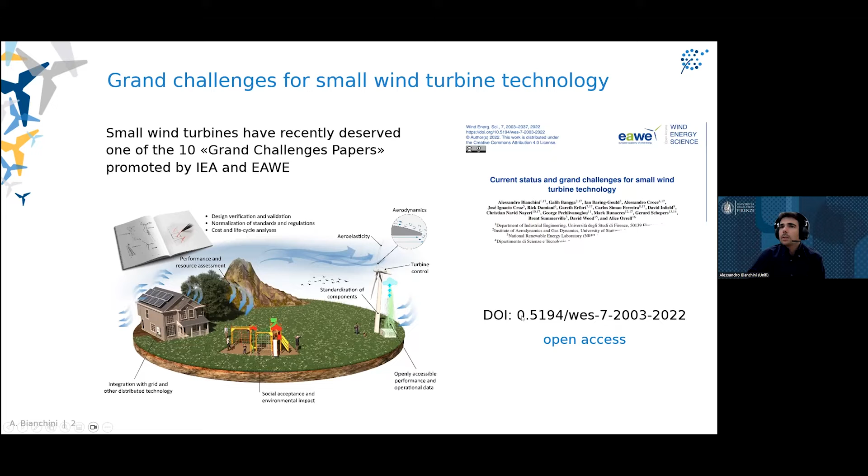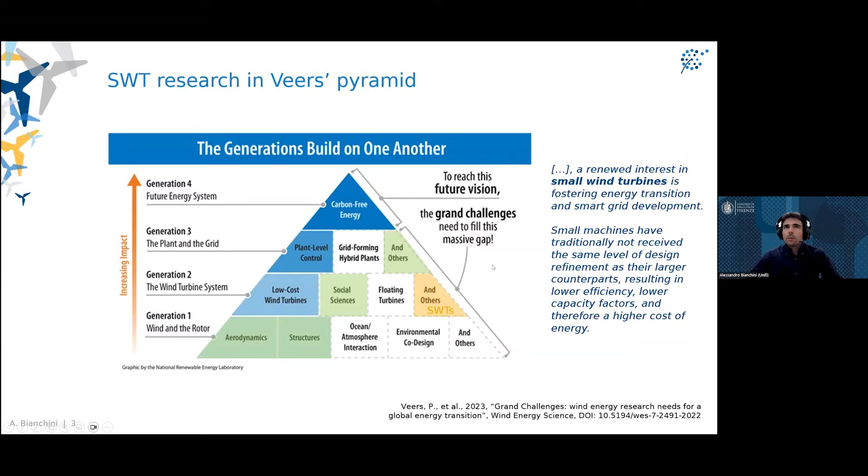A short, non-linear story of the paper: as you may know, the European Academy of Wind Energy created a few years ago some technical committees as collaborative groups to foster research on different topics. I had the pleasure to lead the small wind turbine committee for the first two years since its foundation.

One of the very first scopes of the small wind turbine committee was to deliver a white paper on, as you can imagine, small wind turbines. But what became apparent very soon is that the original plan was to have it focused on Europe, but that was a little bit reductive. The topic needed a more comprehensive approach, and also we needed to gather competencies and experiences worldwide, because Europe is not the only, and probably not the biggest, market for small wind turbines.

So the group became much bigger. We had contributions from other colleagues in Europe as well as all over the world, and also coming from different backgrounds, which is also very important.

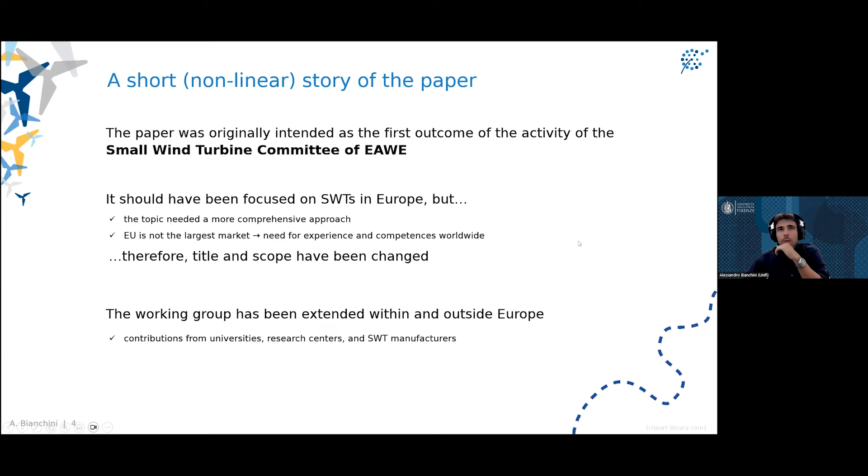The paper had two main scopes. The first was providing an overview on the status of small wind turbine technology. If you take a look at the paper, sections 2 and 3 provide an overview about market diffusion, some updated economic data, and a description of the main technical features of small wind turbines in comparison to utility scale ones. Due to time, I won't present this today, but you can find it in the paper.

The second part was defining, from our perspective, 5 grand challenges that we suggest as key to foster the development of small wind turbines in the near future. Let me repeat: we are not saying this is the only solution. Many of you have experience in this field and may have different visions. The scope of the paper was to restart and stimulate discussion on the topic, and to try to be as systematic as possible.

What we tried to do was first define a series of unknowns and gaps for small wind turbines, and then rationalize all the inputs and experience of the authors into defining improvement areas and prospects to address these existing gaps.

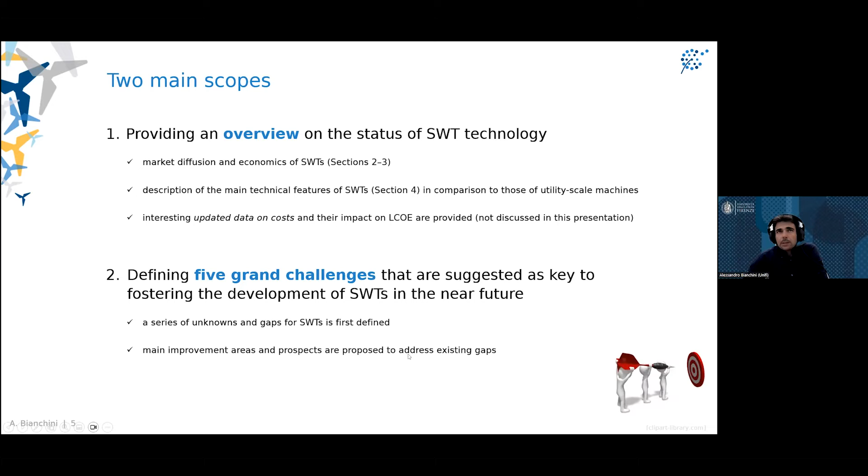As said, we first tried to highlight some of the unknowns and knowledge gaps for small wind turbines, and turned it into 6 main categories. The first is that small wind turbines are entitled to having higher levelized cost of electricity with respect to utility scale wind, mainly due to the lack of economy of scales and higher balance of station costs.

The second drawback is an uncertainty in the actual power curves. Not too many turbines have certified power curves. I was happy to see earlier that some good producers are now providing very high quality products, but on a worldwide average, this is not always the case. We also have uncertainty in the local wind conditions, and this in turn leads to a poor estimation of the annual energy production.

Another drawback is that over the last decades we saw intermittent incentives, regulations, and feed-in tariffs that were not only different from country to country, but also intermittent in time, which makes it very difficult for producers to stay in the market.

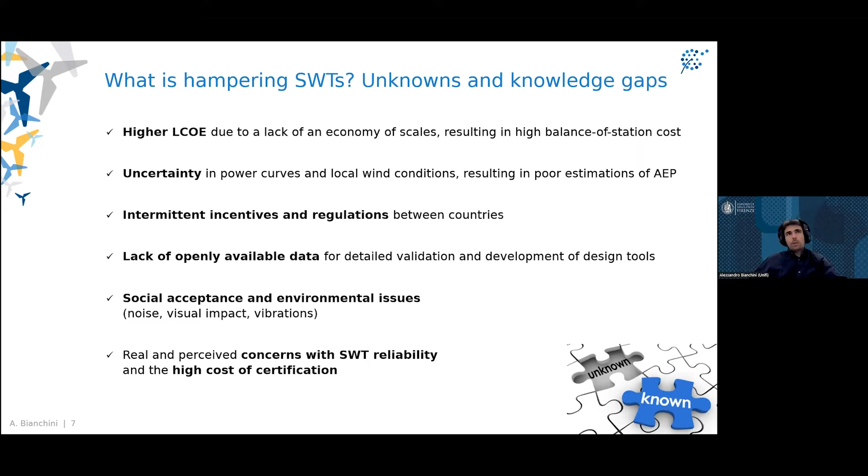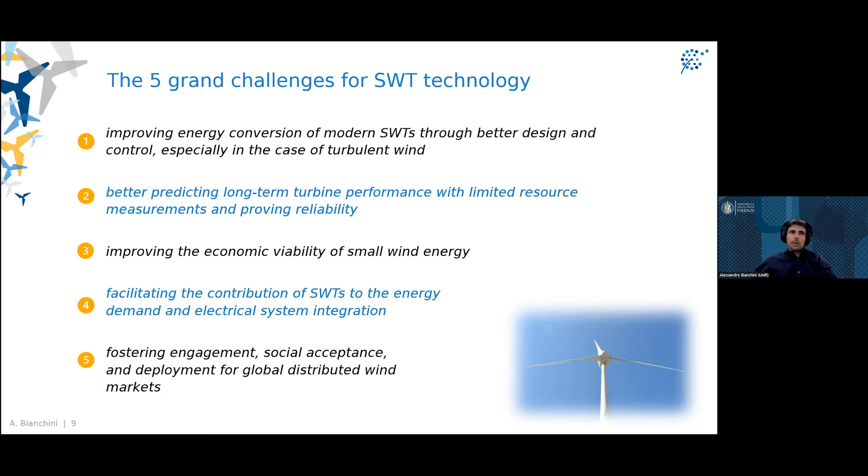Moving from this background, the paper suggests 5 grand challenges that you see listed here, but I won't read them all, and we will try to analyze them a little bit more in detail.

Grand challenge number 1 is to improve the energy conversion of modern small wind turbines through better design and control, especially in the case of turbulent wind. I came from the aerodynamic design field and I'm an expert in airfoil aerodynamics in turbulent cases, so this is probably my number 1 grand challenge.

The background is that small wind turbines traditionally did not receive the same level of design refinement, often to keep costs low. They are typically installed in areas with lower winds and more turbulent, gusty oncoming wind, so maximizing energy harvesting is not easy. That's why many wind turbines have been shown to underperform compared to expectations.

So what can we do to tackle this grand challenge? We need better insight into the impact of turbulence and gustiness on turbine performance, and better design and analysis tools able to account for this complex blade-flow interaction. We need solutions to exploit these winds better, such as taller towers or different rotor designs, like low specific power rotors to harvest energy at lower wind speeds, and multi-objective design to make efficient turbines while keeping costs low.

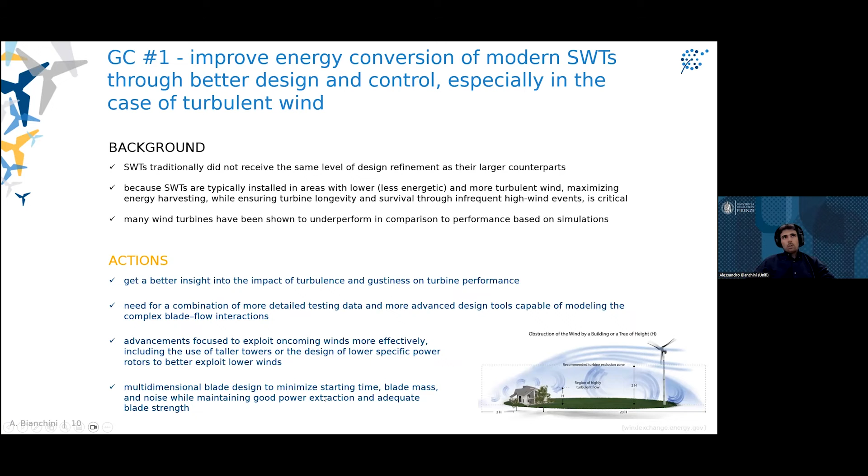Moving to grand challenge number 2: improve the prediction and reliability of long-term turbine performance despite limited resource measurements. Defining the long-term performance of a turbine is mainly made by combining two elements: first, having a good estimation of the actual power curves, and second, correctly estimating the resource. Doing this is not always easy because we often lack reliable measured data.

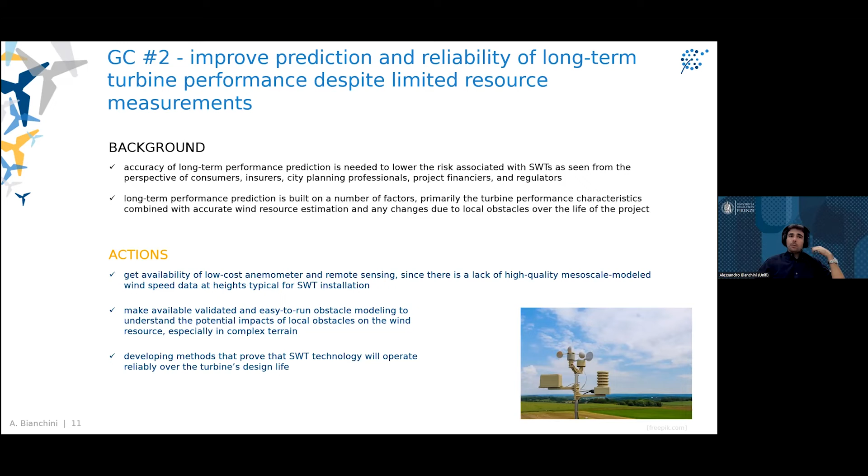So what we can do to tackle this grand challenge: having data, possibly open access, is very important, especially because we miss mesoscale modeled data for these low heights where the effect of obstacles is very relevant. That's why we would also need methods that can better model the impact of obstacles on real installations, and finally develop methods that prove small wind turbine technology can really operate reliably over its design life.

Grand challenge number 3 is probably the most difficult and most relevant: improve the economic viability of small wind energy. We need competitive LCOE. This is particularly tricky because of the cost of materials, installation costs, and because small wind turbines have not coalesced into a single archetype, which makes creating standardized solutions and economies of scale not always easy.

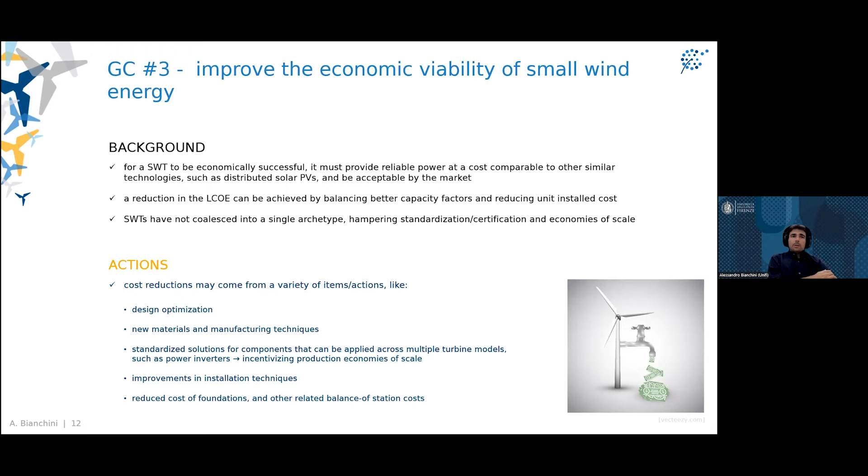So the suggested actions: we need to reduce costs through multiple actions. We can optimize the design, explore new materials and manufacturing techniques. Very important is to access standardized solutions that can potentially be applied to multiple turbine models, such as power inverters, to incentivize economies of scale, and also reduce costs for items like foundations, towers, and other balance of station costs.

Grand challenge number 4: facilitate the contribution of small wind turbines to energy demand and electrical system integration. Currently we have around 1.8 gigawatts of small wind power worldwide, coming from 1 million turbines - a lot of very small insertions of power into the grids. The highly discontinuous power production from small wind turbines can be hampered in some grids which have restrictive limitations in terms of ramp rate.

If we want to convince people, communities, and politics that small wind turbines are really competitive with PV panels, we need not only to make them more efficient, but also to integrate them very well with the grid.

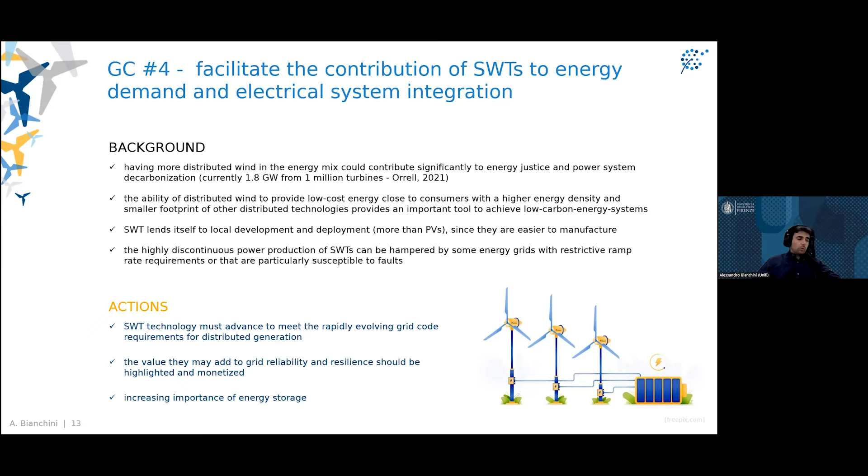So the action we need to put in place: small wind turbine technology must advance to meet evolving grid code requirements. If we invest money into that, we also need to ensure that the value small wind turbines may add to grid reliability and resilience is properly monetized and highlighted. Also, given the increasing importance of energy storage, we need effective coupling between turbines and storage for a variety of reasons - load shifting, but also power quality like power smoothing.

Moving to the fifth and last grand challenge, called foster engagement, social acceptance, and deployment for a global distributed wind market. NIMBY-ism is still hampering a lot of potential installations, so to overcome this issue, we need to enhance the social understanding of small wind turbines, provide real evidence that modern turbines, as in the example we've seen before, are really able to perform much better than their predecessors.

We need to put special attention on environmental impacts, to ensure communities that installation of small wind turbines nearby their houses, buildings, or facilities is not a risk. We also need to push and harmonize policy and regulatory aspects across countries, because this would really allow deployment of the technology in a more effective way.

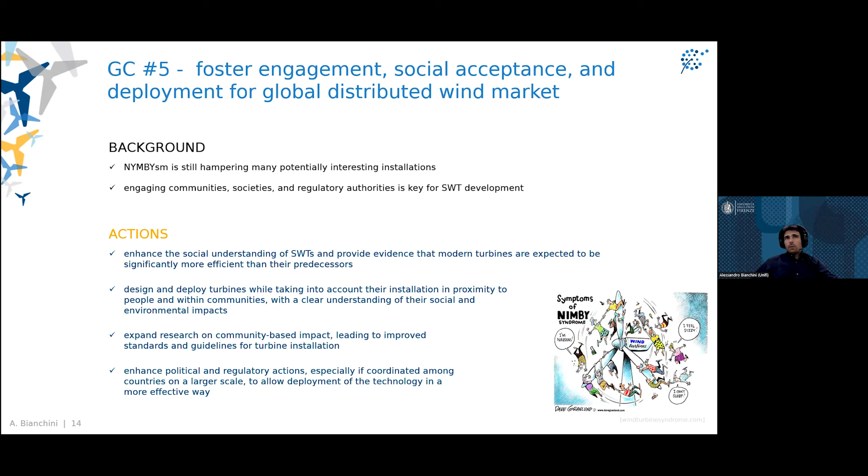To do that, the paper suggests 10 key enablers. I'm running out of time, so I'll go quickly through them, but if you're curious, you'll find many more details in the paper.

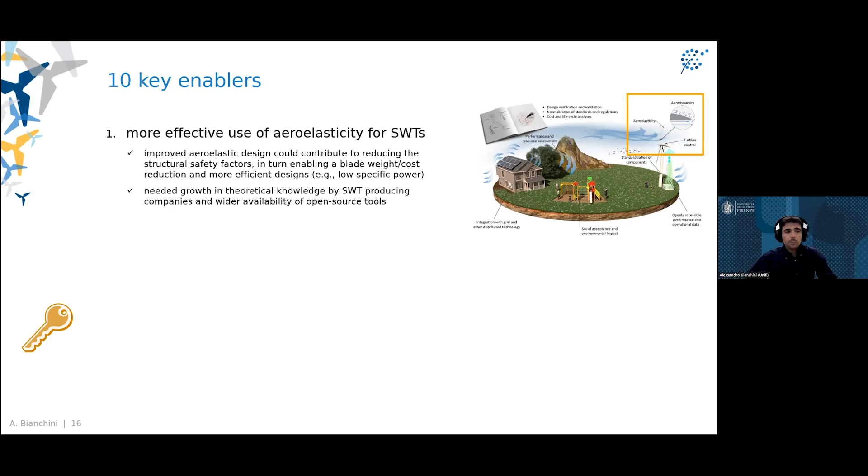The first key enabler is more effective use of aeroelasticity in small wind turbines. Aeroelasticity is the basis for the design of larger scale turbines. It hasn't been used that much in small wind, but if we want to improve the design of new machines - for example going towards lower specific power rotors or having lighter, more flexible blades - we need to introduce aeroelasticity. To do that, we also need to train the personnel of producers to use the codes and really understand elasticity.

We need to improve control strategies. We're seeing a fast transition away from furling towards more advanced active controlled-stall strategies.

There are also some examples showing that individual pitch control, even though it is difficult to include in small wind due to space constraints in the nacelle and cost, could provide real improvement in production and alleviation of loads, which could be useful to make blades lighter and cheaper.

We need to improve the aerodynamic design, especially with focus on low Reynolds airfoil aerodynamics in turbulent environments. This is relevant not only for performance, but also to ensure better control when designing stall control-based machines, and also to reduce noise and account for air density variation.

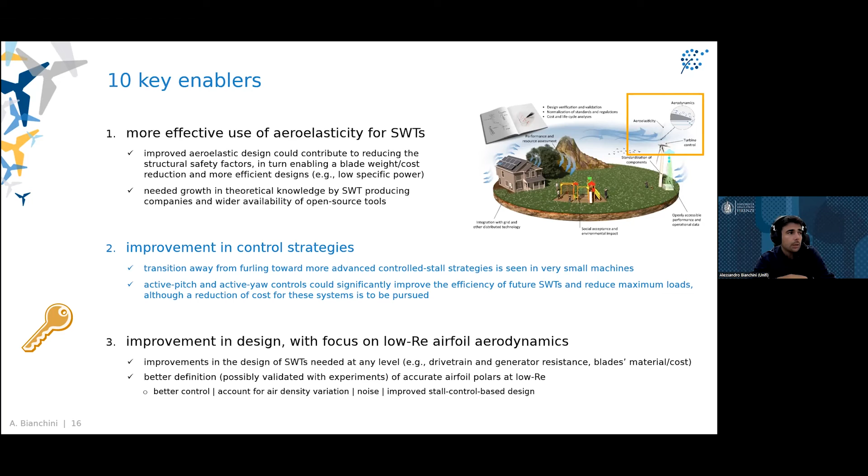The example we saw before of a small wind turbine installed in a mountain is very nice, but if you install a turbine at over 1,000 meters, the density changes quite a lot, so we need to be able to account for that properly.

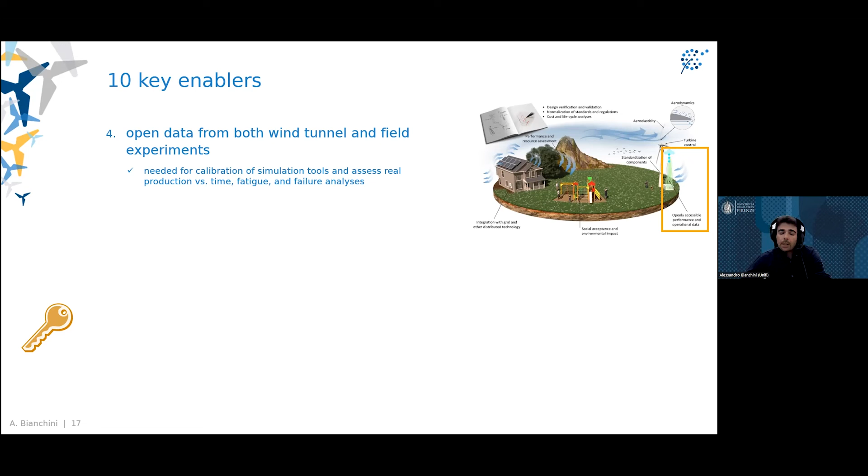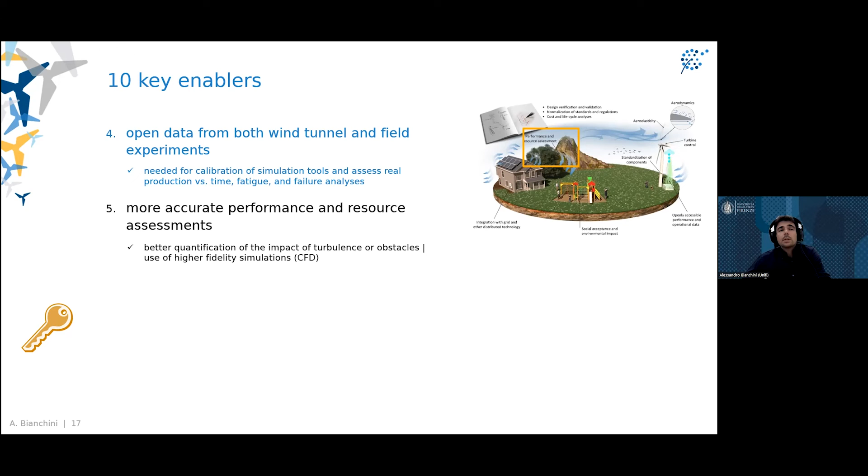Fourth enabler, we have discussed this already: open data, both from wind tunnel and field experiments, to calibrate and tune our models. Fifth, more accurate performance and resource assessment—again we have already discussed it. This can be done both with experimental measurements and with higher fidelity methods like CFD.

Sixth, better validation and verification. This is very important and discussed a lot in the paper, because what we could do in the future—and design is evolving in this direction—is allow smaller turbines and more established archetypes to benefit from less onerous requirements in terms of load assessments, validation, and certifications. This could speed up the process and also promote standardization.

Standardization is exactly what we probably need, because it's very important to promote economy of scale, which in turn reduces cost and makes LCOE more competitive. Standardization, as discussed in point 6, is also needed for regulations and standards.

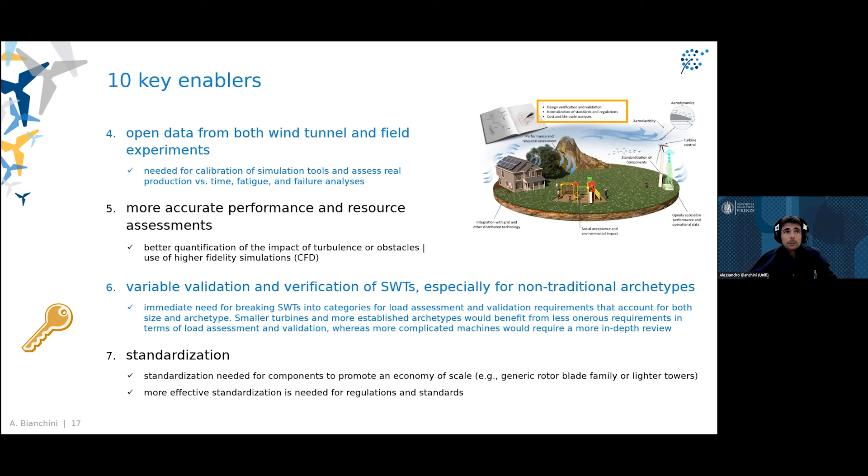Coming to an end, the eighth enabler: we need detailed studies on cost and life cycle analysis, because they are very useful to identify methods to reduce installation cost.

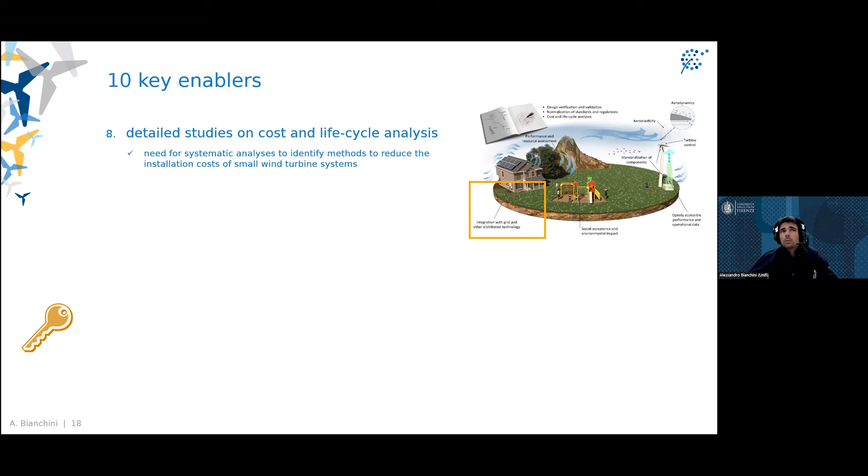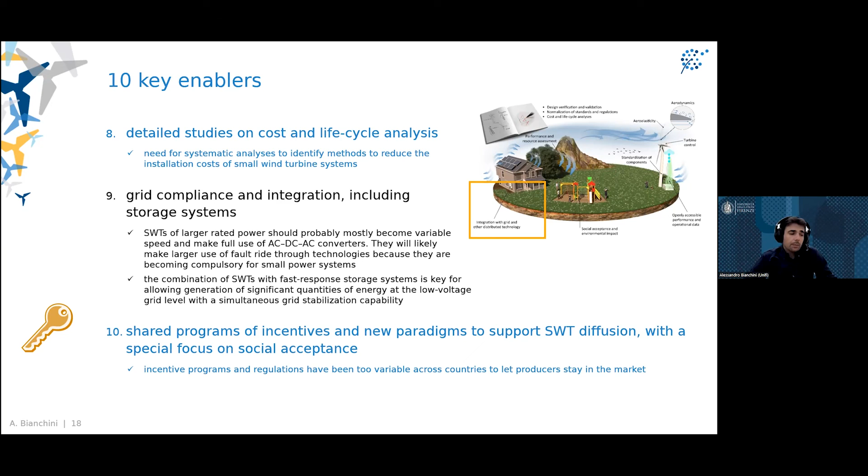We need to make small wind turbines more compliant with the grids and more tightly coupled with storage systems. So small wind turbines should probably become variable speed, make full use of AC-DC-AC converters, and be coupled with fast response storage systems to allow for power quality and grid stabilization capacity.

Finally, we would need to push and promote shared programs of incentives, new paradigms, to support the diffusion of small wind turbines, and particularly we would try to convince policymakers to keep these programs alive and stable for a sufficient number of years, so that producers can really stay in the market.

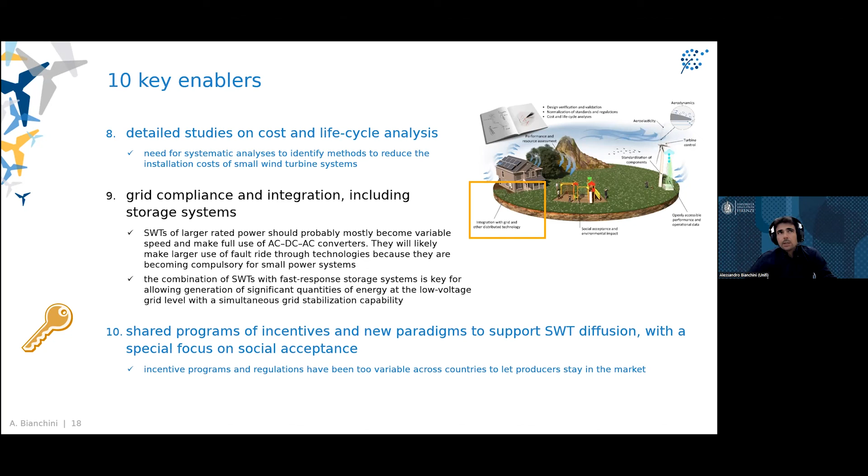So this closes my presentation. The final question is: are we ready?

Please let me thank all the co-authors of the paper. It was a great working group, and I would say also a group of friends, so many credits to all of them. I am presenting on behalf of all the authors, and I really hope that this paper can further stimulate discussion and promote events like the one we are attending today, which are very important.

Thank you very much, Alessandro. Very interesting, and nice to see also many well-known names in the study. Is there any question from the audience?

Probably there would be too many questions, so I understand it's difficult to ask just one. As said, the paper is quite big—35 pages—and it is conceived to stimulate discussion. I really hope we will see some neat and nice advancements in the future, and I'm seeing part of that already in place. I follow some of the companies, I saw many of them participating here, and the progress into new products is very interesting.